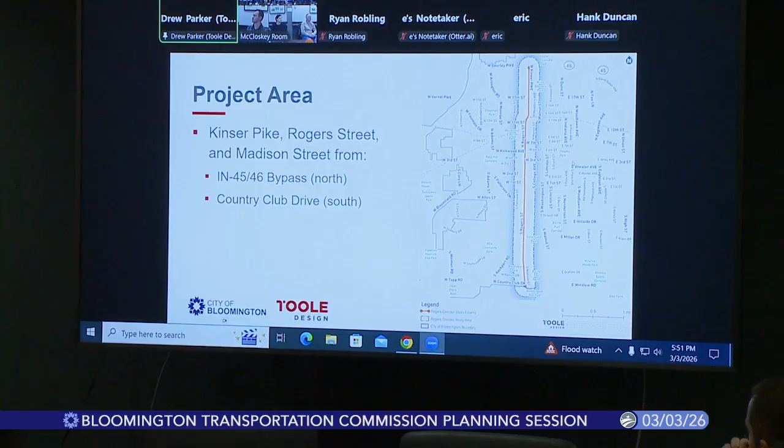Starting with the project overview, Hank covered this verbally, but the project extent we're looking at is the Kinser Pike, Rogers Street, and Madison Street corridor from the bypass all the way down to Country Club Drive. You can see just a corridor extents map here on the right.

The way it's been communicated to us, the purpose of the project is to evaluate existing conditions and make recommendations for design changes to improve safety along this corridor. So this is, to us, really a safety project. It may achieve other goals, but first and foremost this is a safety project housed under the Safe Streets for All plan. We really want to focus on what's the long-term vision for design recommendations, that 10-year window, but also thinking in the short term whether there are rapid implementation projects we can do with quick build materials to achieve some of those same goals that the long-term design is intended to achieve.

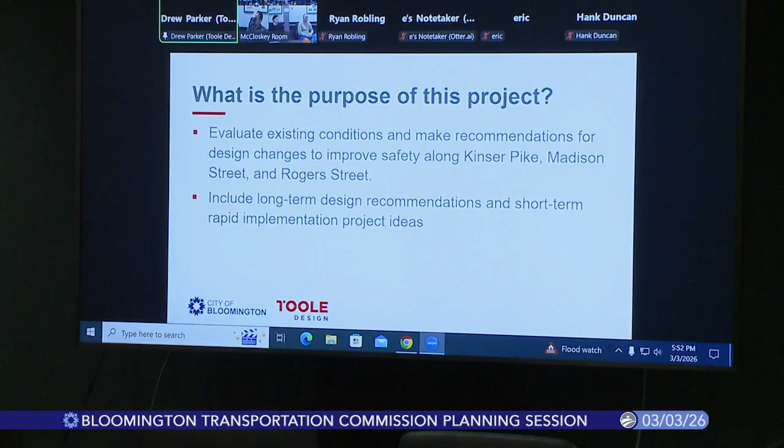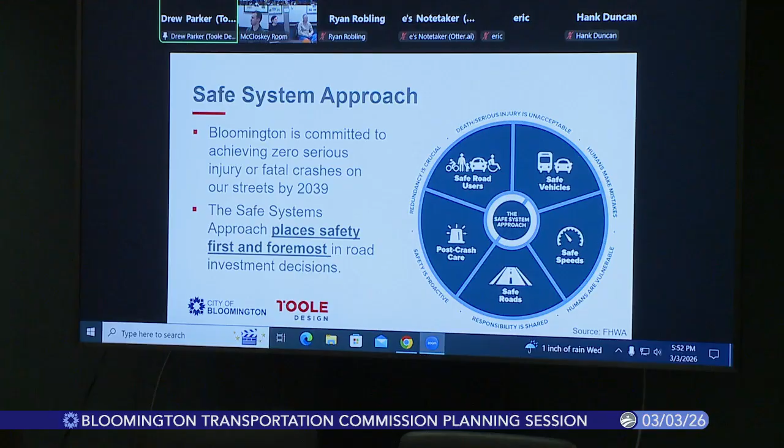Like Hank said, you've all adopted Vision Zero for 2039, meaning we're trying to eliminate serious injury and fatal crashes by then. So this is one corridor within the overall citywide street network where we're starting for this study.

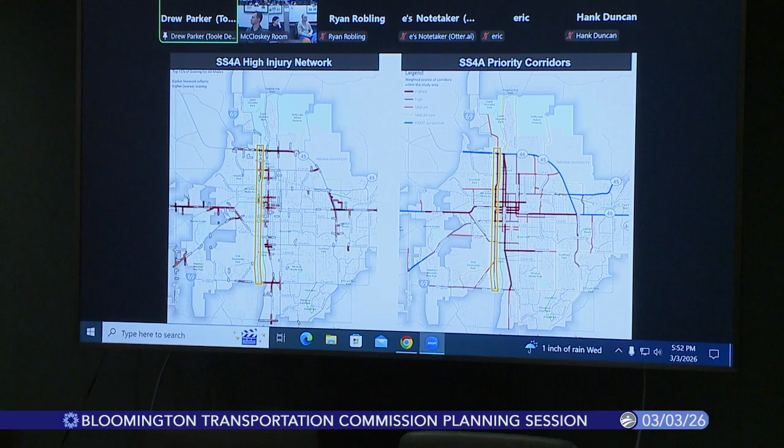And Hank mentioned this as well: on the left side here you can see the citywide high injury network, where those serious injury and fatal injury crashes occur most frequently across the city. Especially along the northern end of this corridor, there's a higher frequency of those types of crashes. And when you look at the priority and other factors Hank mentioned, this corridor, especially the northern end, really rose to the top as the highest priority, or highest tier of priority.

To give you a sense of the project overview, we started work in October, which began with data collection and the corridor analysis, recently completed in draft form. Also coming up with the vision and goals. Our next steps as the project advances are to develop some alternatives for design, then move into a concept design, and then compile that into a final corridor study.

Like Hank said, this is our first Transportation Commission meeting. We will have a meeting during workshop week, that week of March 23rd to the 27th, and then expect a few more Transportation Commission meetings later in the spring and summer. Our public engagement will be, like Hank said, really focused on that workshop week to get as much engagement as possible all at once. But we'll also have an online survey open for a month, so if people aren't able to attend those events during that week, they'll be able to engage with the project via the project website as well.

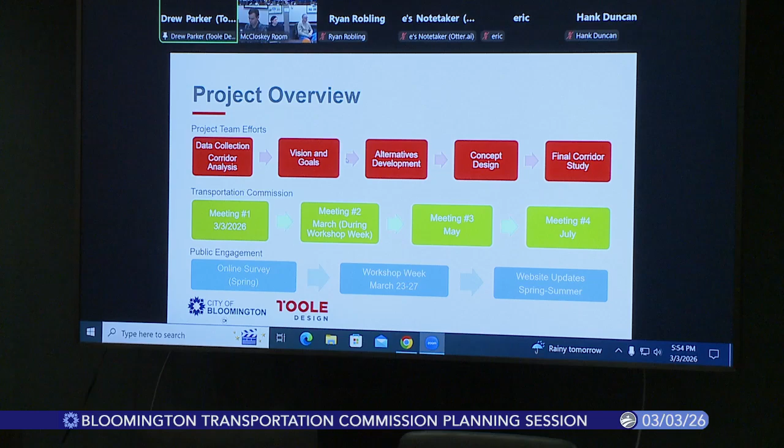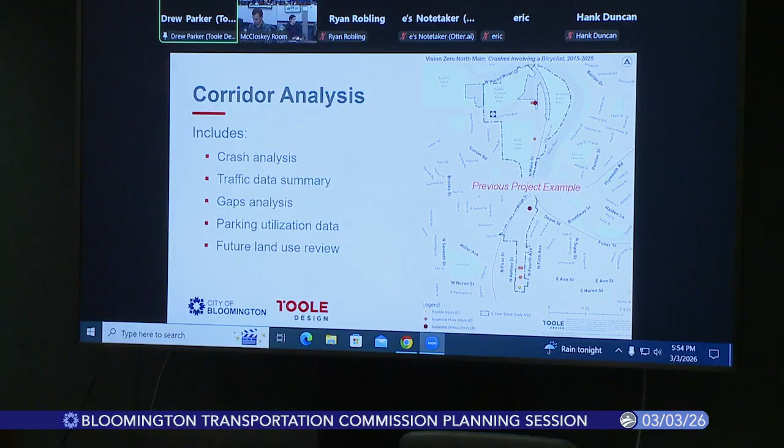I feel like I'm repeating some of the things Hank said, but sometimes it's good to hear things multiple times, at least for me. So the corridor analysis, like Hank said, includes crash analysis and traffic data, a gaps analysis, parking utilization data, as well as future land use review. We'll go through that in the second half of this presentation.

Alternatives development: our goal is to come up with 2 alternative design ideas, and that could vary depending on different context zones. As people have mentioned in the meeting so far, it's a really large corridor that's citywide, and it differs depending on which section you're in.

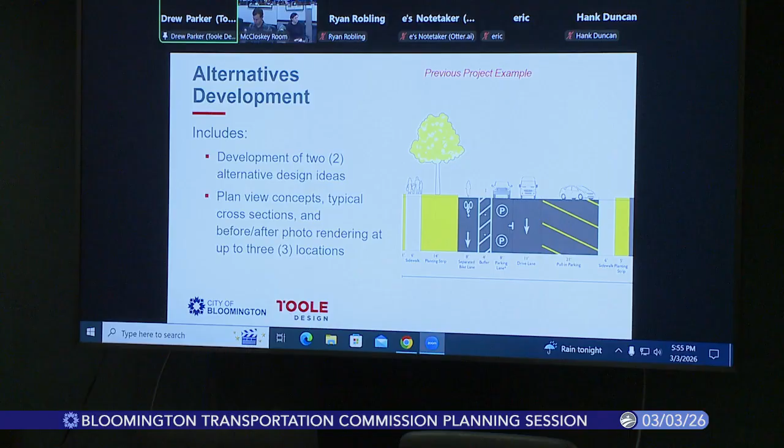As we develop those alternatives, we'll develop some sort of cross-section. You can see this example on the right, just from a different Toole Design project, but we'll come up with something like that and have multiple alternatives and plan view concepts to show. We'll then evaluate which alternative we think meets the project goals and design objectives the best.

So then from there, when we pick an alternative that we want to move forward with, we'll develop plan view concepts at up to 10 intersections. As you can see in the example on the right here, this is just a typical example from another project of what our concept designs generally look like in plan view.

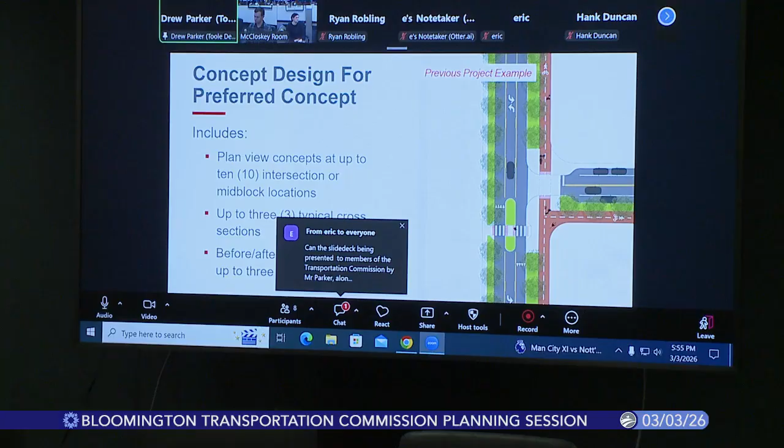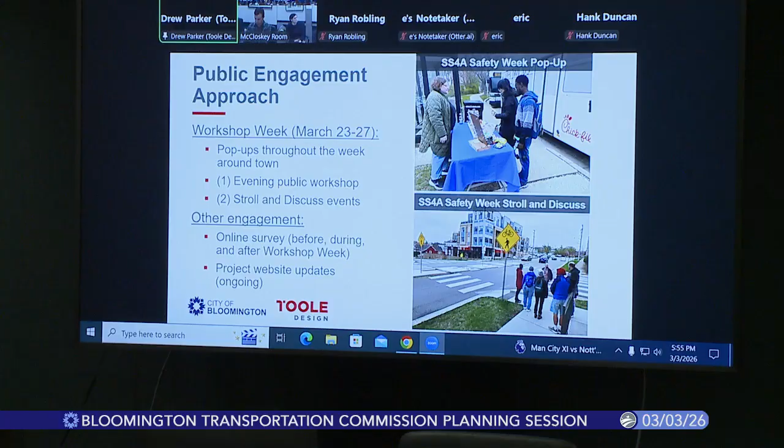Looking at how we can reconfigure intersections and what kind of safety improvement elements we can add there. Our public engagement approach, as mentioned, is really focused on the workshop week. You can see these photos from Safety Week for the Safe Streets for All Plan, where we had stroll and discuss activities and pop-up activities, trying to meet people where they're at with a quick 30-second activity, give them a snack, and send them on their way. It's a nice way to get quick feedback from people who don't have time to come to a public meeting for an hour.

All right, so that covers the overall project overview at a very high level of what we will be doing from now through the summer. The next section I want to move into is the project vision statement, goals, and design objectives.

These are in draft form, statements that we've come up with working with city staff. We're really looking for you all as commissioners to provide feedback on whether you think this is headed in the right direction, and if you agree with the vision statement, goals, and design objectives.

So the vision statement that we've come up with is: the Rogers Street, Madison Street, and Kinser Pike corridor will become a safe, accessible, and connected multimodal street that supports existing neighborhoods, advances Bloomington's values, and guides future growth towards walkable, people-centered places.

So you can see it's really focused on safety first, but there are all these other goals that we're trying to achieve with the corridor study, which is really taking a broad look at the corridor. I'll run through the goals and design objectives as well, and then we can pause, and I'm happy to move back and forth between these slides to talk about each of these with you all.

As far as goals, we have 6 goals that are intended to support this vision. The first is to eliminate fatal and serious injury crashes, which we'll do through street design changes that we know can help reduce the chances of those crashes. We also want to support multimodal travel for all ages and abilities.

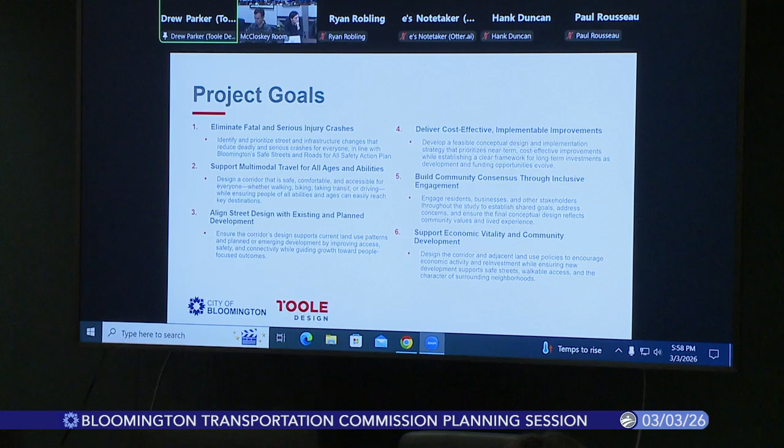In addition to those project goals, we also have 8 design objectives. Design objectives are really intended to support the goals, and the goals support the vision. But the design objectives are, in my mind, the way that you evaluate the different designs to see if they're achieving the things we're trying to do with this project.

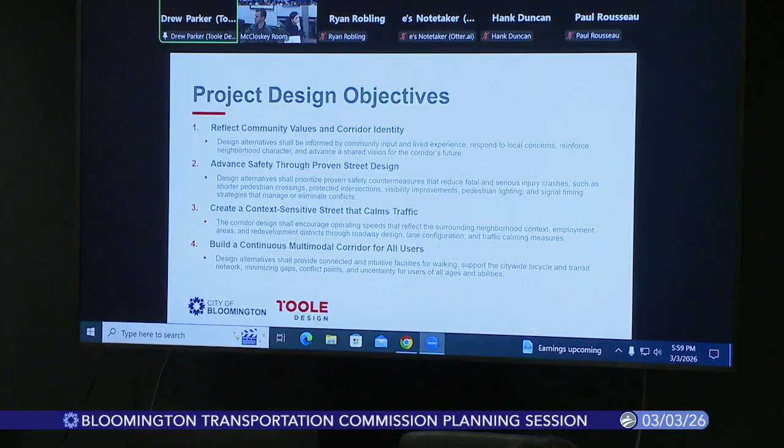So the first design objective is to reflect community values and corridor identity. The second is to advance safety through proven street design. The third is to create a context-sensitive street that calms traffic. The fourth is to build a continuous multimodal corridor for all users. And the fifth is to ensure universal accessibility and comfort.

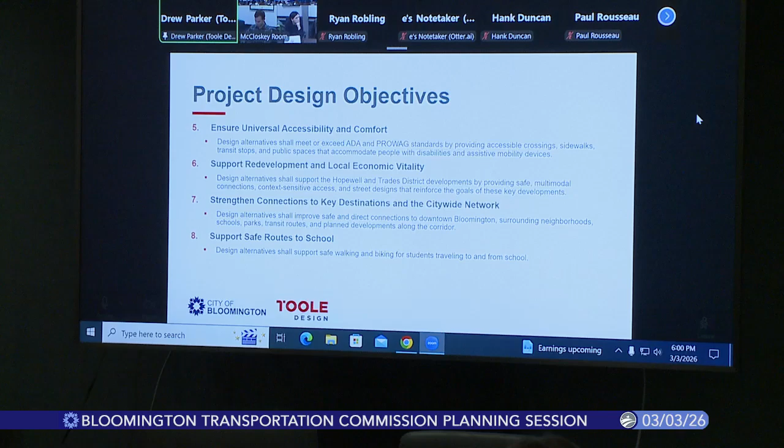The sixth design objective is to support redevelopment and local economic vitality. The seventh is to strengthen connections to key destinations and the citywide network. And the last design objective is to support safe routes to school. Each of these design objectives can be evaluated, and we can say whether or not the alternatives we're proposing are achieving one or all of these 8 different objectives.

The next thing I wanted to mention is that staff have already taken a cut at splitting the corridor up into different context zones. As people have mentioned, it's very different along the corridor depending on where you're looking. So city staff have already, at a draft level, said these are what we think are the 4 different context zones within this corridor.

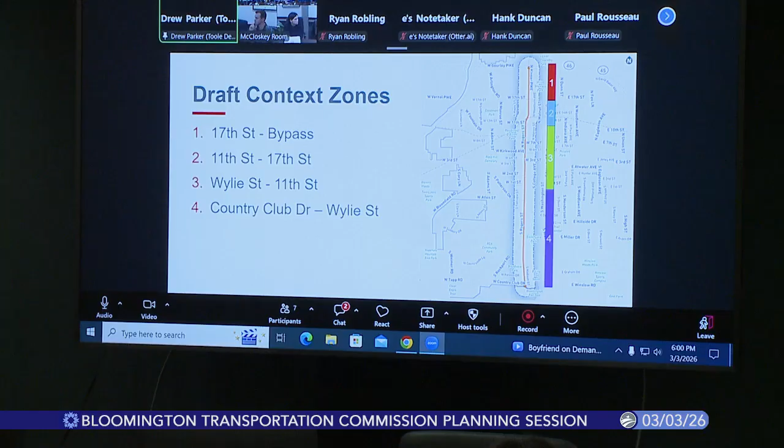So the first section is the area north of 17th Street to the bypass. The second area is from 11th Street to 17th Street. The third area is from Wylie Street to 11th Street. And the fourth area is south of Wylie Street down to Country Club Drive.

I know there's a lot of information to throw at you all, but I want to pause there and see if folks have initial thoughts on any of those things that we just presented, and we can start wherever folks want to.

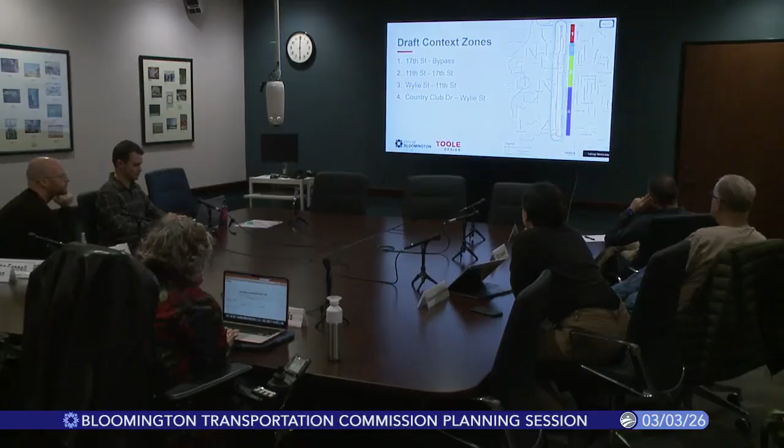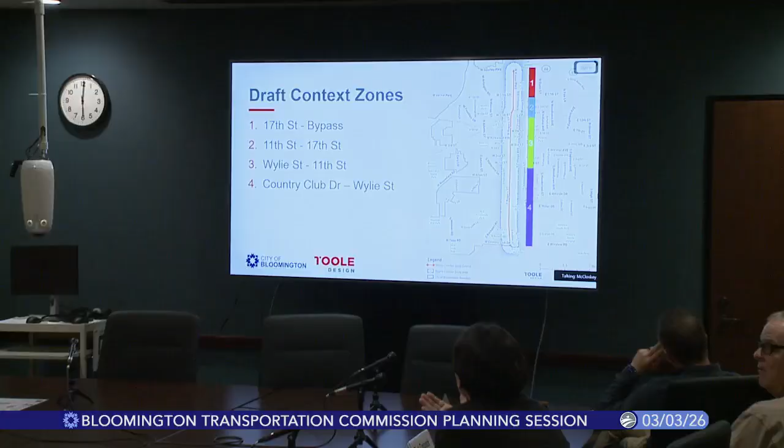May I jump in? Yeah, thank you so much, Drew, for this presentation. Would you mind going back to your previous slide where you show the 4 segments? I think commissioners would maybe just like a moment to take a look at these 4 context zones for just a second. Absolutely. As a follow-up, I think I would ask maybe if you can give more context on how they were originated, like what is the reason behind them being like that?

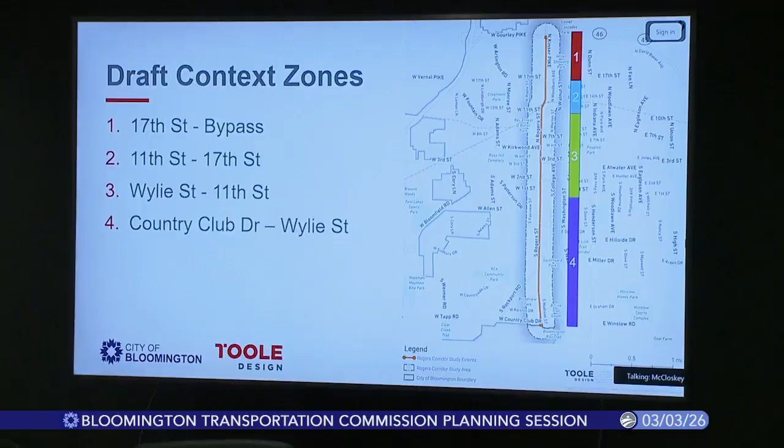So there's no perfect answer here, and also this is very much a back and forth. These are the context zones and this is what we're going with. If you have other feedback, please give it to us. Essentially, how we defined it, I'll start south and go north from there.

From Country Club up to Wylie, it is almost primarily residential. There's some businesses over there, but it's residential, and that's where you see less of that downtown, more urban context, and it feels a little bit more suburban. You have long stretches without crossings in there or major intersections. You have a couple with Patterson, or what is it, Rockport, thank you. But it's not too many.

But then once you get into that third section, the Wylie to 11th Street, that is your downtown area. Wylie is where the Hopewell development begins, where you have the new police station, where you have these businesses coming up, and you have just a much denser urban context going through downtown.

And then 11th Street to me is that barrier of, okay, you are leaving downtown and you're entering more of a residential space again. 11th to 17th, this is a smaller context zone, but to me that is an area that is delineated on both sides by 17th and 11th, where it feels different south of 11th and it feels different north of 17th. And then 17th to the bypass is, again, you could arguably combine those top 2, 1 and 2, into one, but to me they just feel a little bit different than each other. There is no perfect science to this, I do want to say, but looking at the aerial view, looking at the land use, and looking at the street as a whole, that's how we initially defined it.

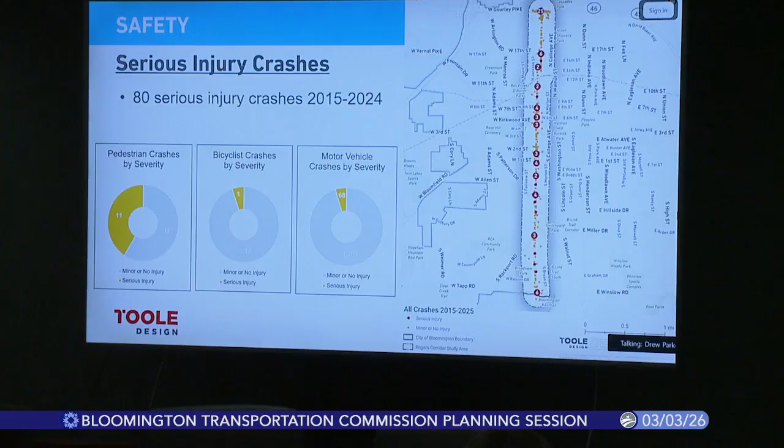The most common serious injury crash types are right angle crashes, when someone drives into the side of another car. Typically at an intersection, that could be from running a red light or other failure-to-yield type behaviors that result in more severe crashes. The second most common serious injury crash type was rear end crashes, and the third most common was pedestrian involved crashes.

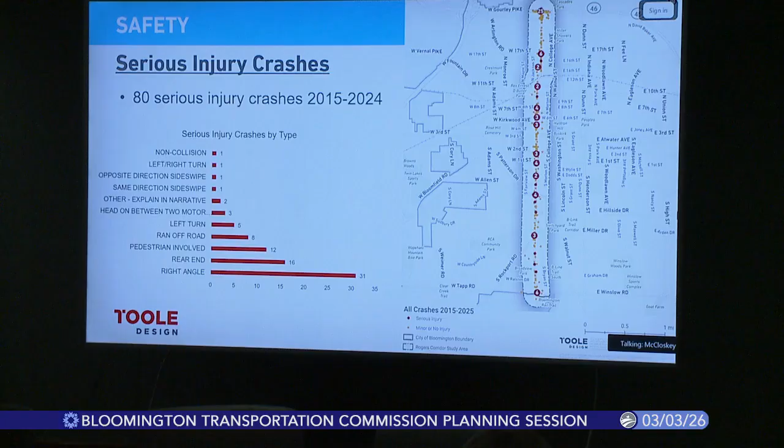So those are my best guesses, I don't know exactly without looking in detail at those. I think those are just checkboxes on the police report. Yeah, could be. Okay, it's just a couple of them out of a whole list, so not a big deal, but I figured I'd ask. Thanks. Yeah, thanks for the question.

So this map shows just the crashes involving pedestrians. 11 of these resulted in a serious injury. It's a small sample size for 10 years, so there's not necessarily a clear pattern, but there were 2 at the bypass, which had the most serious injury crashes. In general, you can see where crashes, whether minor, no injury, or serious injury, are clustered - more north of First Street, which is why in the Safe Streets for All plan that area was a higher priority. Some of that also has to do with more people walking around in that area.

I'm sorry to interrupt, but a question - is there a reason the data is limited to 10 years? The reason I ask is I have a memory of at least 2 fatalities at 46 and Kinser within the last, maybe 15 years, and I thought that's a bad intersection. But if we know of it, does this only include what's listed in police reports, or if we have information of other injuries, do we include that data? So that's 2 compound questions for you to answer.

I apologize. No need to apologize. This is just crash data from police reports, so if it's not there, we didn't have access to that data. As for why we looked at 10 years, we typically look at a 5-year window - the last 5 full years of data. We looked at 10 years just to have a bigger sample size, honestly, to try to draw more conclusions. That's why we did that in this case.

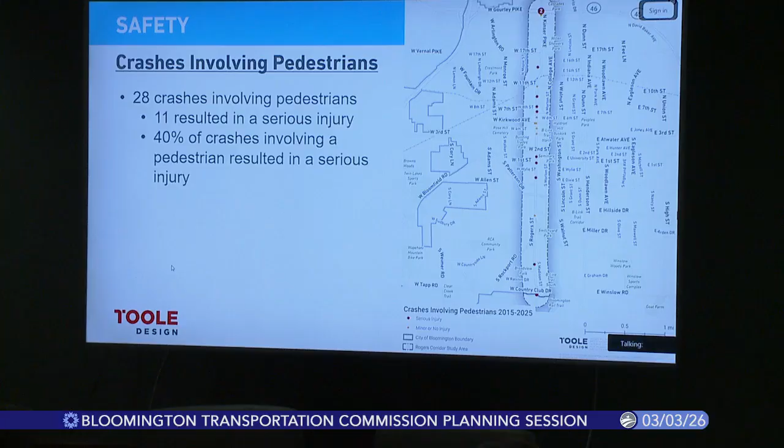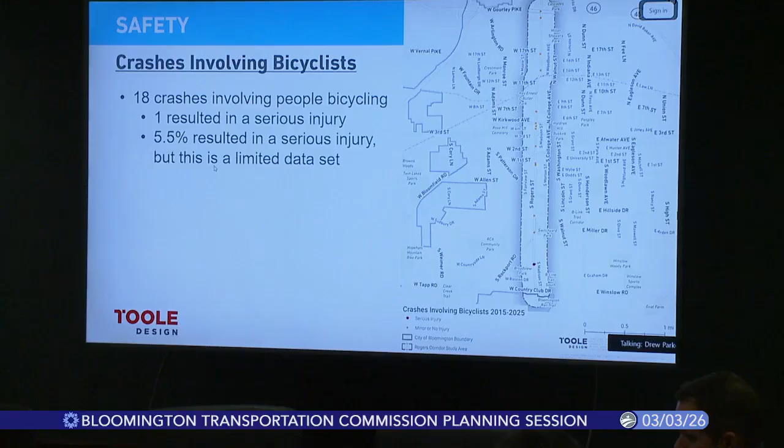So crashes involving bicyclists - there were 18 in that 10-year period, 1 of which resulted in a serious injury, and that was on the south end of the corridor. This is a pretty limited data set, a pretty small sample size to really draw a lot of conclusions from. But our goal is to have no crashes where a pedestrian or bicyclist is hit.

Crashes involving only motor vehicle drivers - 68 of these resulted in a serious injury. You can see similarly, the bypass had the most serious injury type crashes, and 5% of the crashes during the study period resulted in serious injuries.

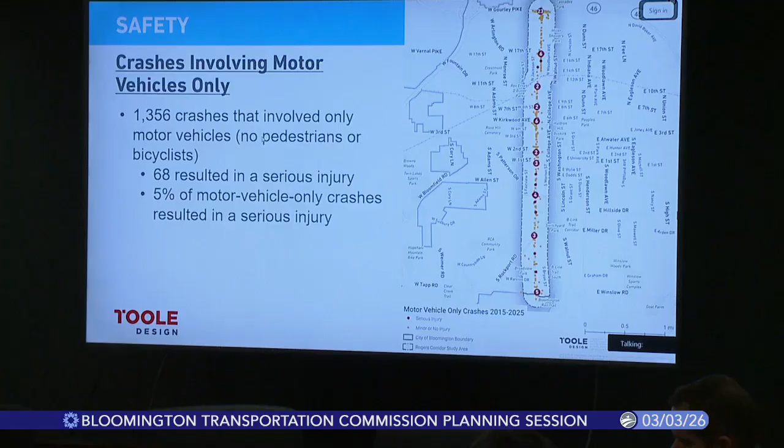So looking more in depth at safety, getting to the systemic safety and priority analysis that Hank was talking about previously in Safe Streets for All. When we don't have tons of crash data or very clear conclusions on where we think there are safety problems based on historical crash data, we can also look at speed data, because we know speed is a factor in the potential for severe crashes to occur.

So in this case for the corridor, we have 2 different traffic counts that had speed data recorded. The map here shows what the speed limits are in the corridor. North of 17th Street and south of Patterson, the speed limit is currently 30 miles an hour, and in that middle segment, the speed limit is 25 miles an hour.

There were 2 previous traffic counts done, and the city plans to collect additional traffic counts to supplement this. But of the 2 that we have, currently motor vehicle traffic volumes are between 9,000 and 11,000 vehicles per day. In the section between 8th and 9th Street, the 85th percentile speed was 33 miles per hour, and the 85th percentile speed is the speed at which 85% of drivers are driving at or below, and it's typically used as the speed to set the speed limit.

The other count we have shows speeds a little bit higher, so down between Hillside and Wilson Street, south of Patterson, the 85th percentile speed was 38 miles an hour. From a safety perspective, these are pretty high speeds for areas where there are pedestrians and bicyclists crossing, and those higher speeds create the potential for more severe crash outcomes should a crash occur.

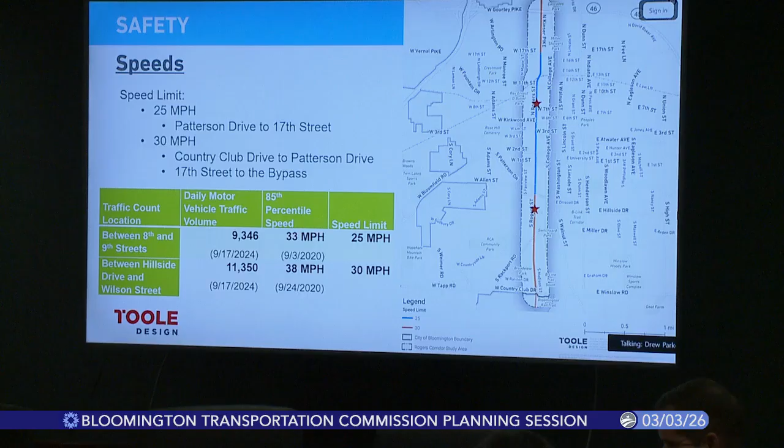Looking more in depth at the motor vehicle traffic volume, we like to look at the hourly capacity of streets to understand how existing traffic volume compares to the capacity of the street. So what this chart shows is that at the location where traffic volume is a little bit higher, between Hillside Drive and Wilson Street, the capacity of a signalized 2-lane street is 720 vehicles per hour per direction.

Because there are turn lanes, we really consider this to be a 3-lane signalized corridor, which is the green line, at 864 vehicles per hour per direction. So breaking down that traffic count, we just wanted to show that the traffic volumes are well below the carrying capacity of the street.

Typically we say with a 2-lane street that has left turn lanes, the upper limit of motor vehicle traffic volumes is about 25,000 vehicles per day. So even with that higher volume being 11,000, we're significantly below the capacity of a two-lane street with left turn lanes at intersections.

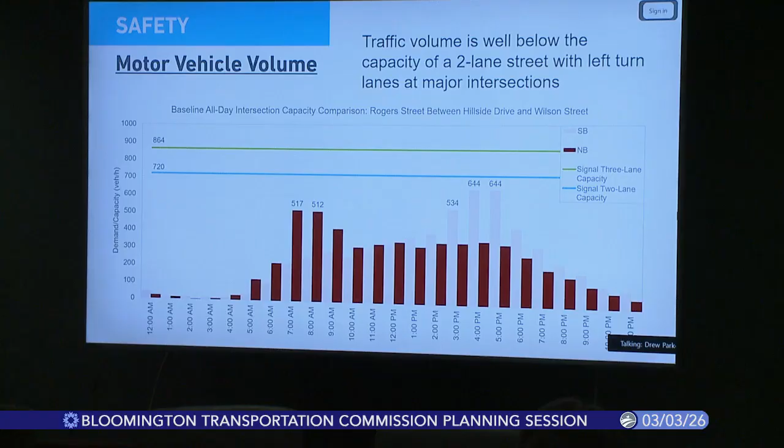One reason we like to bring this up is because when there's excess capacity, or the volume is significantly below the carrying capacity, that means in off-peak periods, people can actually speed because there are no other cars to get in their way. We know that can be an issue in some communities. But the takeaway point here is that the traffic volume is significantly below the carrying capacity of the street.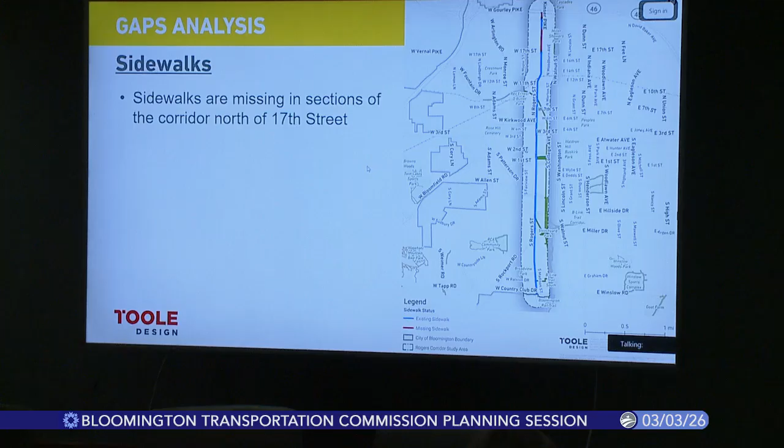We also mapped all of the existing bicycle facilities. South of Patterson, there's a multi-use path on the west side of the street, but north of there, there's not really any bike infrastructure. There are occasional bicycle lanes, which are sometimes only on one side of the street, and there's no bicycle all-ages-and-abilities connection that goes across the railroad tracks on the north end.

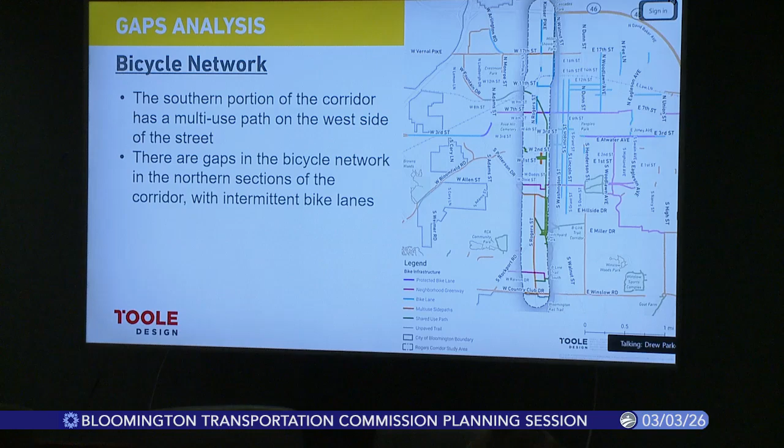We also mapped the existing pedestrian and bicyclist crossings. This map shows all the locations of crosswalks along the corridor as dots, color-coded by what type of crossing infrastructure there is at that crosswalk: either rectangular rapid flashing beacons, I think one at 4th and one other location on the corridor, or a crosswalk with a crossing warning sign, just the orange pedestrian crossing sign, or a crosswalk at an all-way stop, or a traffic signal.

Looking at all those crossing opportunities, we also mapped the distance between them, and divided that distance by 2 to determine, if you were halfway between two crossing opportunities, what's the maximum distance you'd have to walk to get to a pedestrian crosswalk. You can see there are a couple locations with pretty long stretches between pedestrian crossing opportunities. We picked 900 feet as the top threshold because that's about a 5-minute walk at a typical walking speed.

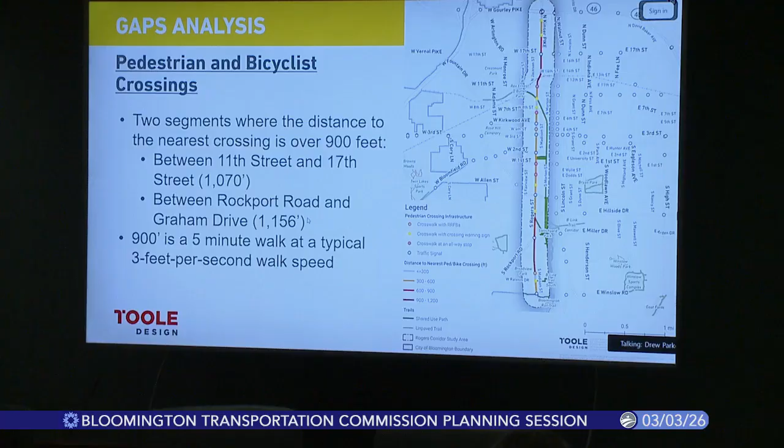We also mapped all the streetlights along the corridor. There are two different types of streetlights: standard streetlights, shown as red dots, which are larger overhead streetlights intended to illuminate the whole roadway.

There are also yellow pedestrian-oriented lights in a couple different stretches, one between Switchyard Park and 1st Street, and another between Kirkwood and the Beeline Trail. There are a few intersections with no lighting at all: Howe Street, Smith Ave, and 3rd Street. As part of our proposed alternatives, we'd propose adding additional lighting at those intersections.

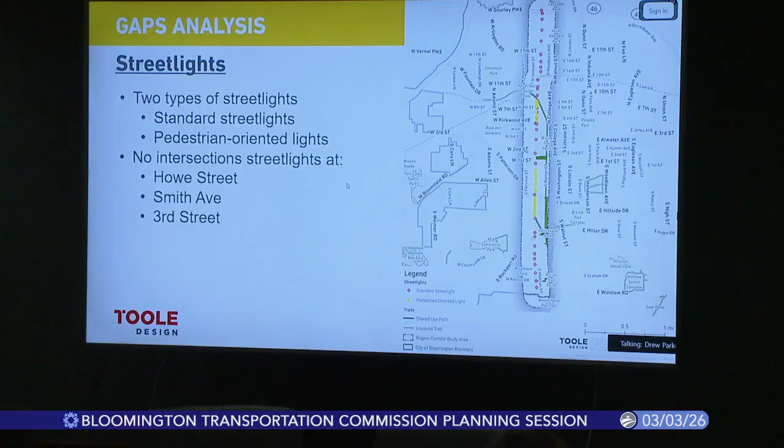We also mapped the bus routes along the corridor. Most Bloomington transit routes that run along the corridor only run for a couple of blocks across it, rather than north-south along it. The exception is Route 2, which runs along Rogers from 1st and 2nd Streets down to Graham Drive and Rockport Road, making a loop and coming back up.

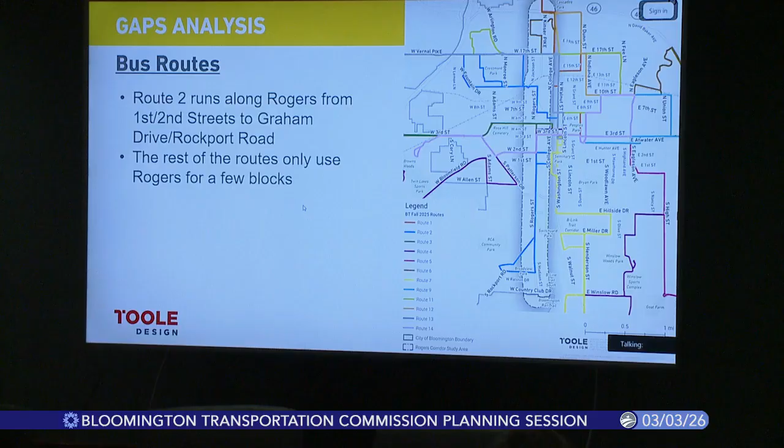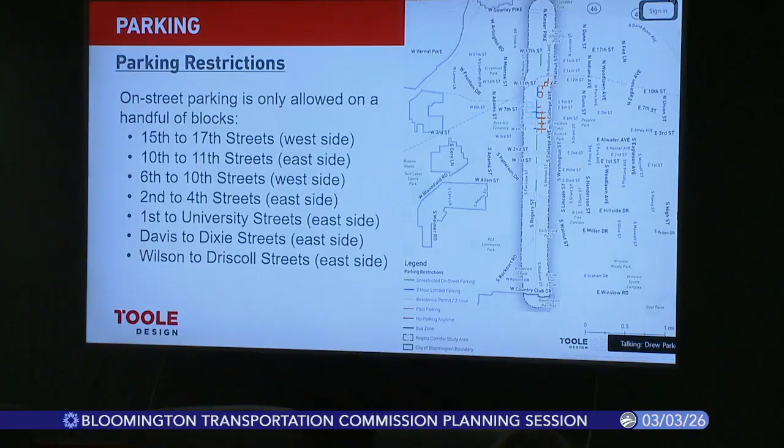We also looked at existing parking restrictions and on-street parking opportunities along the corridor. There's a very limited amount of on-street parking allowed. Most stretches don't allow it, but there are a handful of pockets where parking is permitted. We also did a parking utilization survey to see how much this on-street parking is being used, and found that it's very underutilized, almost not used at all.

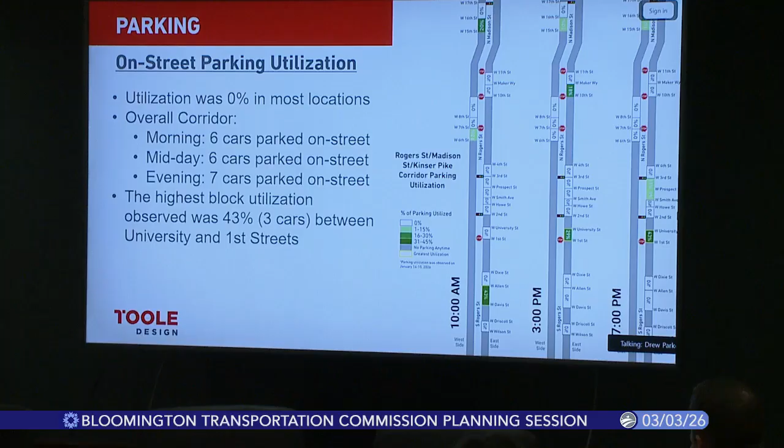We looked at three different survey periods: morning, midday, and evening. The maximum number of cars ever parked along the entire corridor was 7 cars, in the evening period. There was one block between University and 1st Street where, in one period, there were 3 cars parked. Overall, the takeaway is that though some parking is permitted on this corridor, people aren't really using it hardly at all.

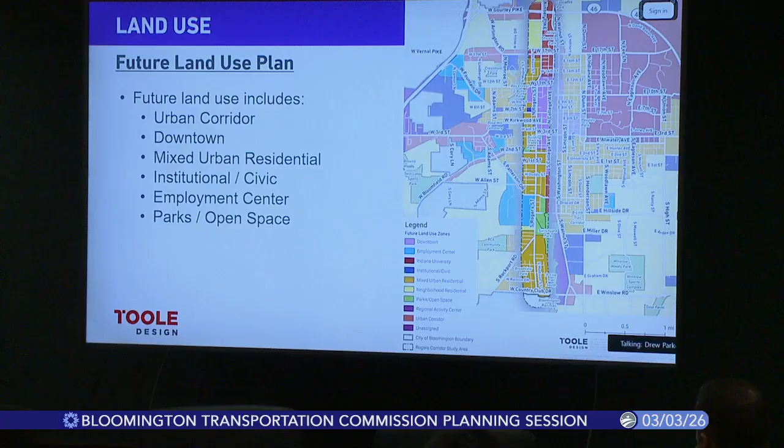The future land use plan includes a proposed urban corridor on the northern end, the downtown area, and mostly mixed urban residential, with pockets of institutional and civic, employment center, and parks and open spaces.

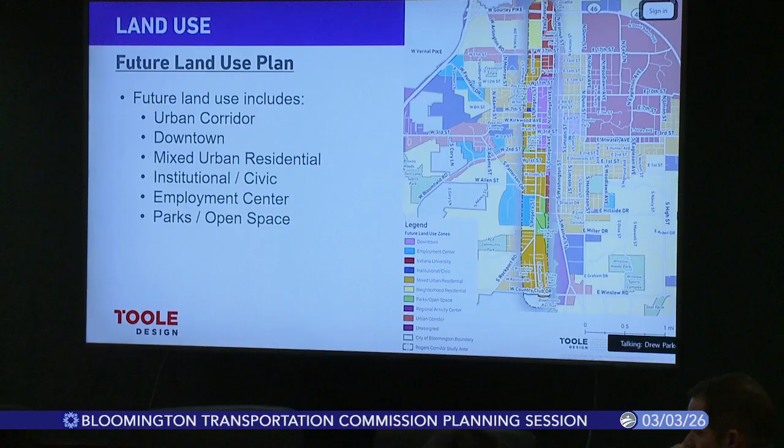The last land use element we mapped is known ongoing and future development areas. There are three major ones: the Aspen Heights redevelopment, the Trades District, and the Hopewell redevelopment. These are major areas redeveloping currently and in the future, and we want to keep that in mind as part of the study and how the street design can support those developments.

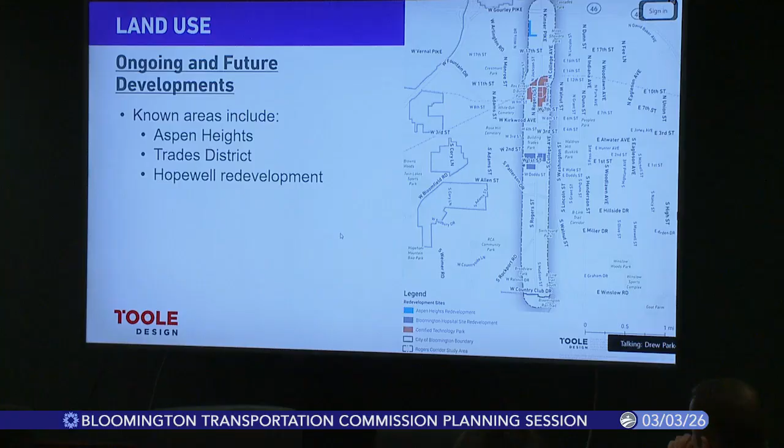So, all that being said, we pulled together 7 key findings we think are important takeaways from this analysis. The first is that the Rogers Corridor is a top priority for safety improvements. In the last 10 years, there were 80 serious injury crashes, and 11 of these involved a person walking, so it makes sense that it was a high priority corridor in the Safe Streets for All plan.

We also think speed is likely a contributing factor to some of these safety concerns, with 85th percentile travel speeds of 33 and 38 miles per hour, significantly higher than the posted speed. At that upper end, 38 miles per hour becomes a pretty dangerous speed for crossing pedestrians.

Another finding is that some areas of the corridor are really comfortable and walkable, but outside of those pockets with nice street lighting, multi-use paths, and sidewalks, there are quite a few sections that are less pleasant to walk along, with missing or deteriorating sidewalks and not great pedestrian lighting.

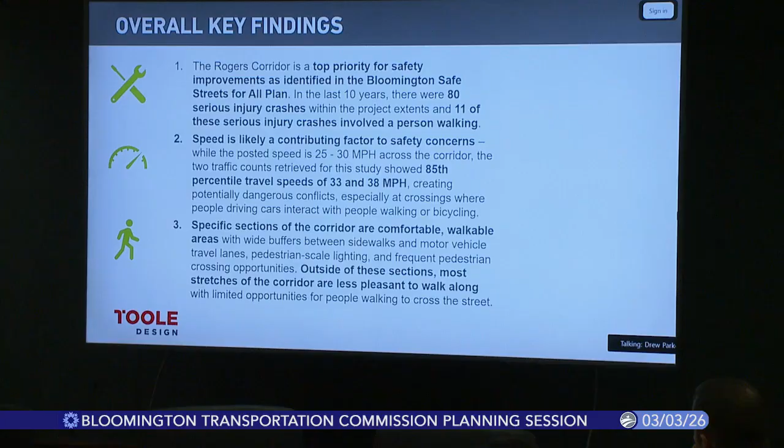Our 4th key finding is that the southern portion of the corridor has a nice multi-use path on the west side, but moving north there's gaps in the bicycle network, and there's no low-stress bicycle option to connect over or under the railroad tracks in this stretch.

Our next key finding is that on-street parking is allowed only along several blocks of the corridor, and utilization of this very minimal on-street parking is very low, in most cases 0%.

Our 6th key finding is that there are key redevelopments happening, and improving the streetscape design can support the city's goal for these new developments to support safe streets and walkable access.

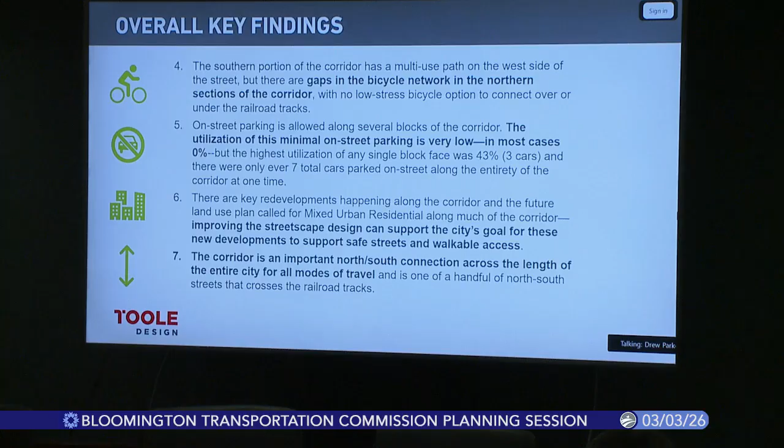Lastly, one key finding is that this corridor is an important north-south connection across the length of the entire city for all modes. This is one of those streets that everybody has to use no matter how they travel to get through the entire city, north to south.

So that's a summary of our analysis findings thus far. I'll open up to questions, and I'm happy to jump back to any slides as needed.

Mr. Chair. Oh, yes. Thanks very much, Drew. A couple comments, questions, corrections.

There's one at Smith, but it is frequently burnt out, so it was probably just not illuminated when somebody was looking at that one. And then 3rd Street, there is now a streetlight there, but there used to not be one.

And then another comment on the 3rd Street intersection. That's going to be a major intersection because that's a high pedestrian volume, a high vehicle volume. There is a street light there, thankfully now, I think at the southeast corner. But someone crossing the street on the north side or the east side of that intersection is crossing 5 lanes of traffic, so it's a big intersection. There's just one street light there.